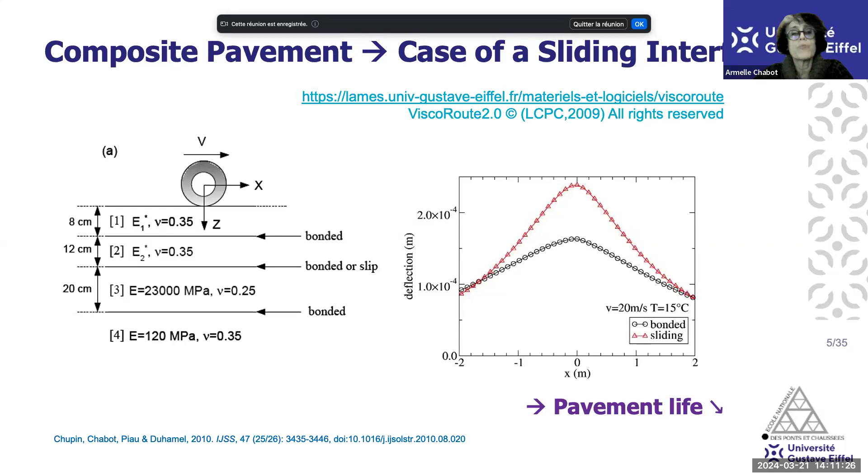If you look on the top of the pavement, sliding interface will make more deflection, and it will play a role on pavement life.

But actually, we need more than modeling and strain gauges or things that are upper the pavement. That's why, with my colleagues from Direction Générale de l'Aviation Civile, Michael Broutin, and my PhD student who did her postdoc there, we use the ovalisation system that was developed by my colleague from LCPC in the past for roads, and we adapt this device for airfield pavement.

And so this device is making, with sensors that are measuring the deformation, the diameter deformation of the hole when you have a load or you use a heavy weight deflectometer.

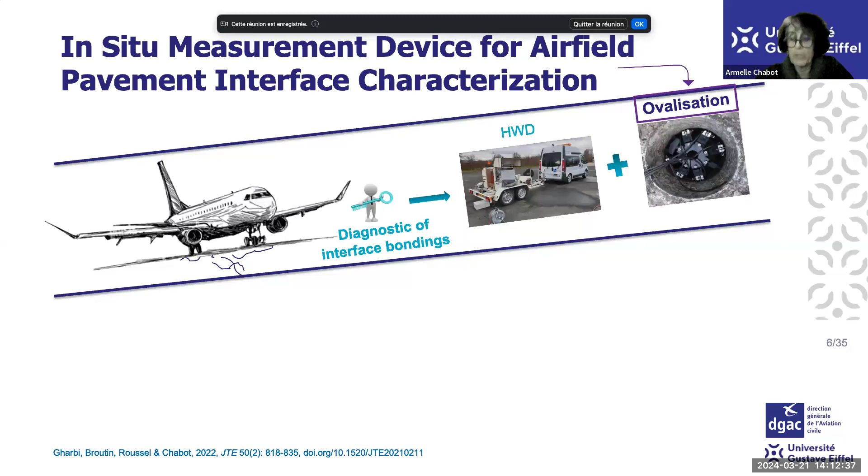So we developed a first specimen, and at DGAC they have now improved this system a lot, and I hope they will present this to you later.

We couldn't use ViscoRoute because there is a hole, and in the software ViscoRoute, we are assuming that the behavior of each layer is the same. It's the same kind of modeling as the Burmister elastic model that is used in our French design method, and I think in America you are using this for KENLAYER software.

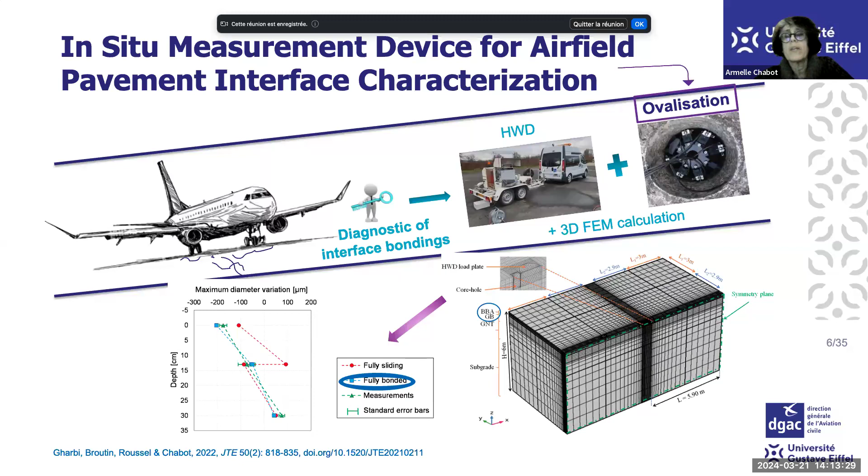And we showed, for one experiment, measuring and getting access to what we had from 3D FEM modeling, that the interface at this location was fully bonded. The main problem for pavement is it's not only full bond or full debonding, it's more complex.

Here on the upper part of the slide, my colleagues from the past took extracted bi-layers from airfield pavement at that time when we developed the Airbus A380. At the time it was named A3XX.

And you can see, it's well known, that if there is a good bond, due to the bending effect of loads, you have tension stress at the bottom, and the crack comes from the bottom up to the pavement. But when I'm saying up to the pavement, it reaches the interface.

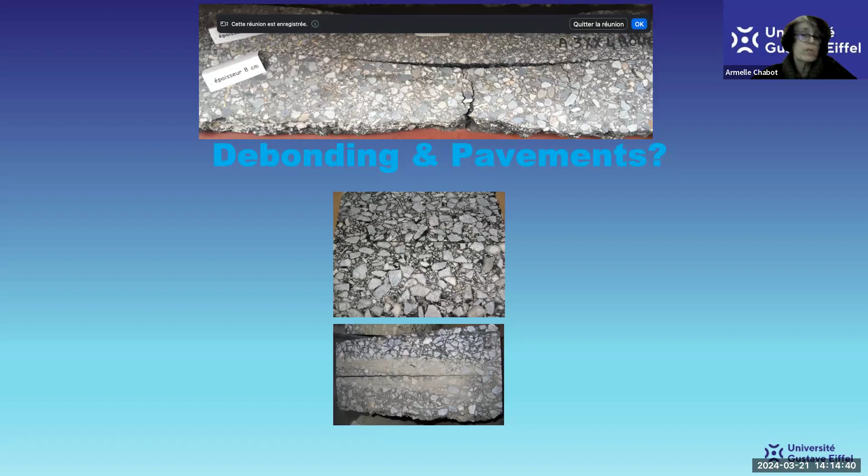And here, we need to have the behavior of the interface and the criteria in the material and in the interface, in order to see if the crack will propagate along the interface or up through the layer.

So my knowledge is more on that, saying that when you have free edges in the multi-layer, you cannot deal with only 2D structural modeling. You need to have 3D.

For this example, if you take 2 layers and do a tension test, you will see that there is sliding at the interface, but at the edge, you also have sliding in this out-of-plane direction.

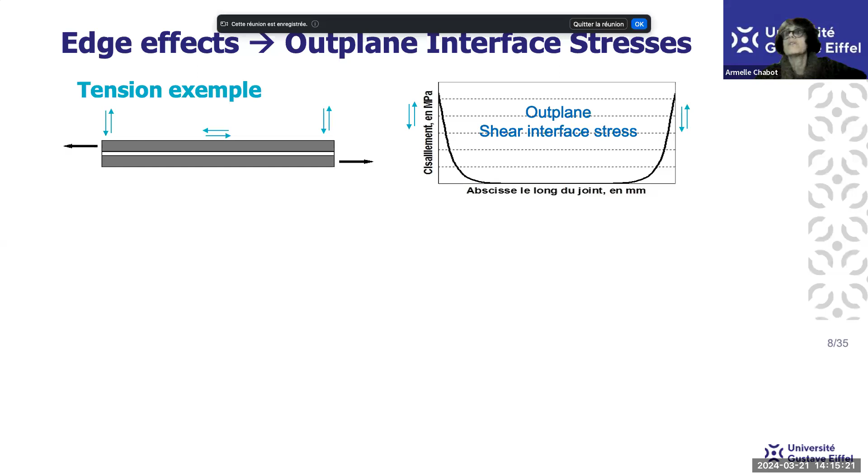It is also well known from the composite field that when you have a bending test, you may assume to have a crack, and normal interface traction and out-of-plane shear interface stress that are quite zero far from the edge, but at the edge there are critical stresses.

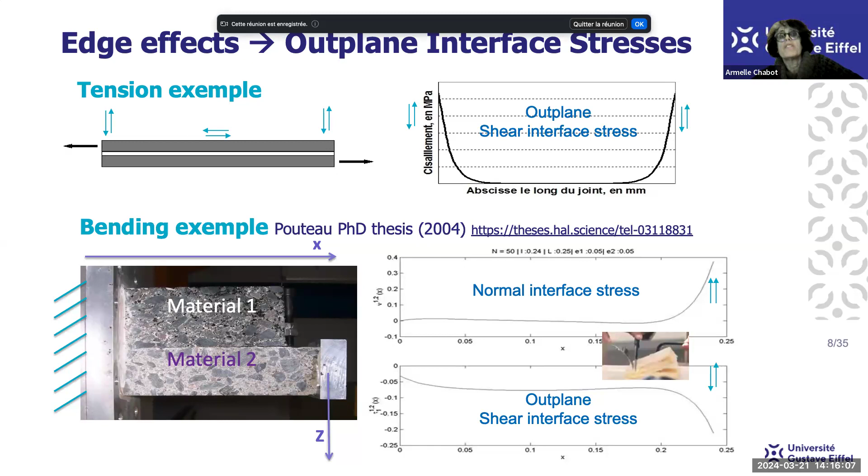And dealing with failure, we need to have tools that are able to model and test, that are able to give this information. That is why in my PhD thesis a long time ago, I studied that, dealing with failure.

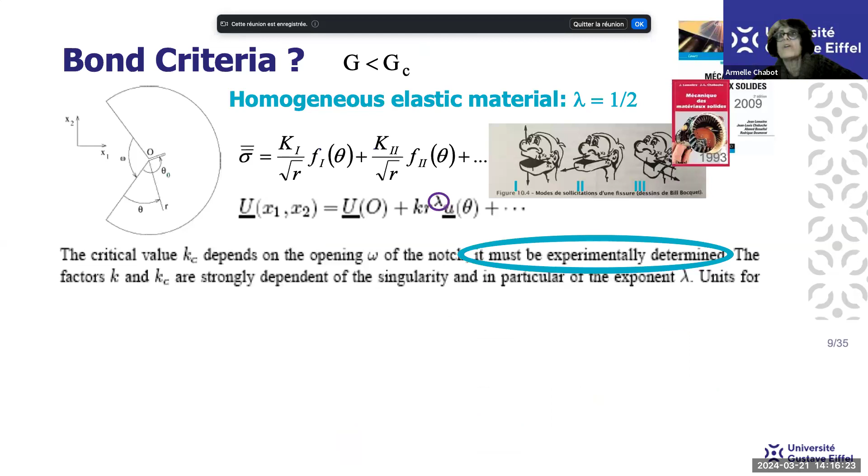Everybody knows that if you deal with a homogeneous material, you will have a singularity at a crack. But for bi-material, when you have a crack at the interface, mathematically and mechanically, the lambda coefficient that is normally 1/2, half, becomes a complex number. So there is no physical meaning.

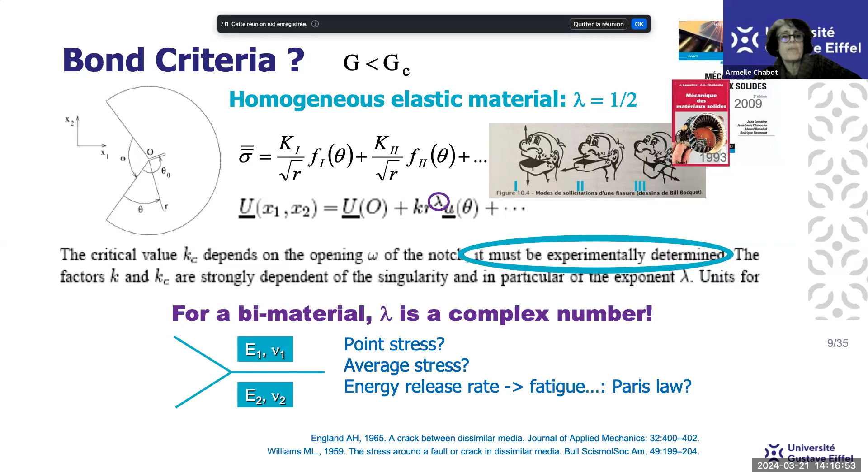And a lot of people have worked on this for the composite field and developed their own models. In my PhD, I developed a family of models that rest on the fact of dealing with multi-layers. It's plates. So I tried to use plate modeling that I have improved.

And saying that, I assume with my advisor, of course, that the 3D stress can be written as a polynomial approximation per layer in Z, where Z is the out-of-plane direction. This is possible in Hellinger-Reissner formulation because it leads to a mixed formulation, making it possible to solve the problem. As we know everything in Z, we only have to deal with solving a problem in X and Y, which are the coordinates of each layer.

To do so, each factor of this polynomial approximation, we choose to have them like a generalized force of plates of Hellinger-Reissner that I'm showing here. So for each layer i, we don't have Z, but we have i, the name of the layer. We have the sigma, 3D sigma, that is developed as a polynomial expression of N, Q, and M.

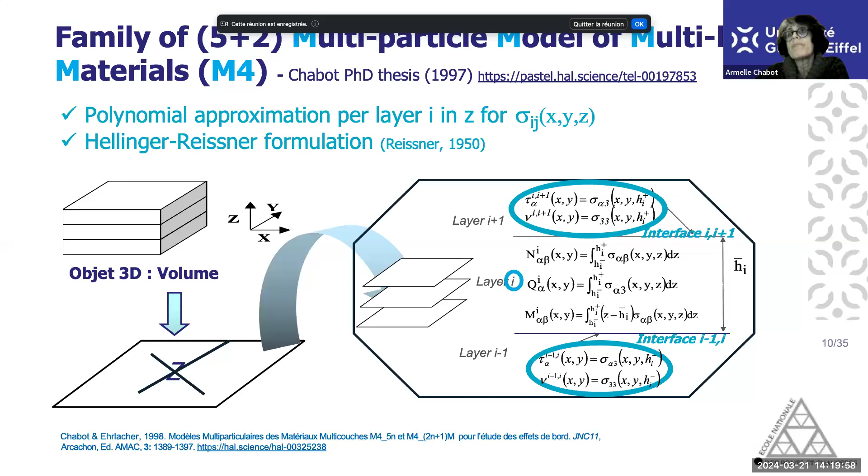So when I came at that time, it was LCPC, not Gustave Eiffel. I tried to develop this model for pavement.

Pavement has a soil, so I chose to use Winkler soil because it's very simple to assume it's a kind of spring. In the composite example I gave with this cohort, dealing with elastic material at that time, but with a vertical crack, you can see in that figure that the interface between layer 2 and layer 3 is opening in this direction. When the loads are close to the crack, the value of this interface becomes bigger and bigger. You can do that with 3D fine modeling, but if you refine the mesh thinner and thinner, you will find you never converge.

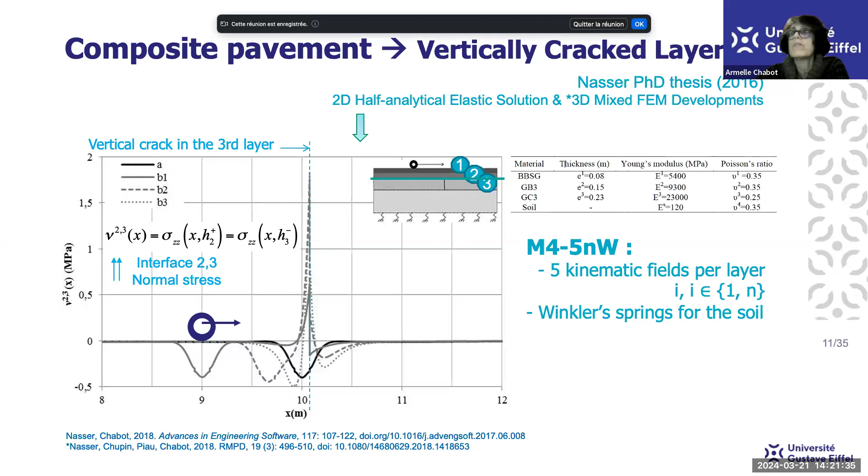With that modeling, it's fixed, so we can compute this and solve it numerically, but at the end it reaches a value. That is very nice if we want to use that modeling in dealing with a criteria.

I just want you to see this illustration. Lately we are also working with electrified roads, and for the induction problem, it's a slab that you put inside the pavement. I was part of a Chen PhD jury and was very surprised there wasn't much information about the bond between the slab and the pavement. That's why I took a student, Pawan Deep, who improved the M4-5N model in order to take into account that other material in one layer.

Of course it's obvious, but if you put a rigid box in an asphalt layer whose modulus is not so strong with temperature and load, I was recommending maybe to deal with that. At that time, the box was made with cement concrete, to have a cement concrete layer on top of asphalt in order to reduce these stresses between the box and the layers.

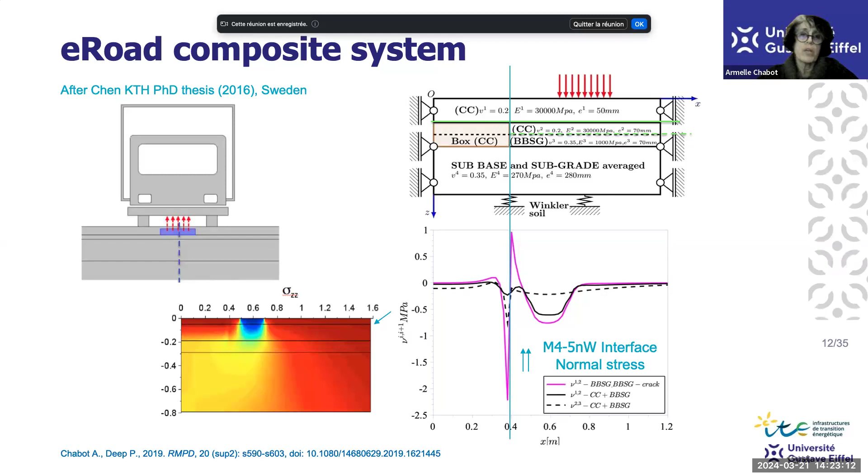That's it for the modeling, but I will come back later. I have mentioned that we need some tests and failure criteria, so that is why I will present lab characterization.

During my stay at Urbana-Champaign in 2010, I had the opportunity with Bill Buttlar to start a new technical committee of RILEM. I pushed a lot to have a technical committee dealing not only with cracking in pavement, but also debonding, and not only in asphalt pavement, but also composite pavements. In that TC, we had three task groups, and in TG2 with Christophe Petit, Alexandra Destrée from BRRC in Brussels, and Christiane Raab from EMPA.

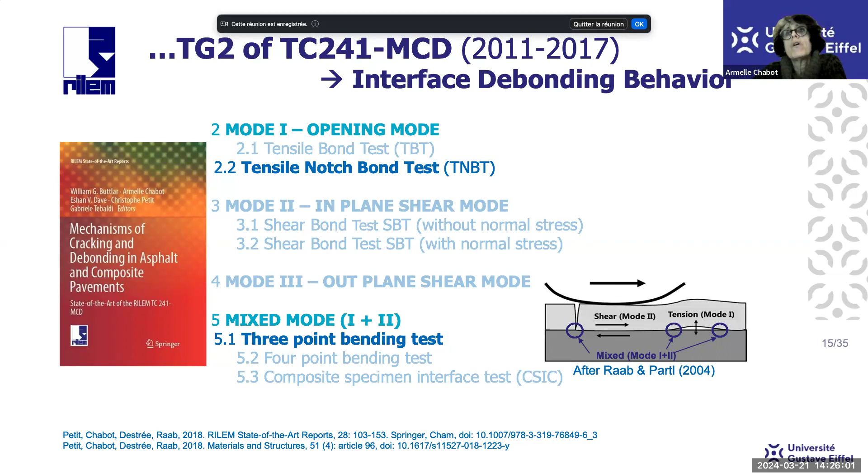So here I will show you what I have done in my lab. First of all, I worked on the bond for ultra-thin white topping. At that time when I came, it was not a question to deal with the bond between asphalt layers - it was something we didn't have to deal with. So I worked on that.

And we developed a test, a four-point bending test, where I used my modeling in order to design the test. First of all, we chose at the end to have a non-symmetrical test in order to localize the debonding at one edge and not at either of the two edges. We follow the debonding with DIC.

In this figure, you can see, between the elastic equivalent modeling of the two layers - asphalt, the black layer 1, and cement concrete, layer 2 - there is a competition between the tension stresses at the bottom of layer 2, supposed to be cement concrete, at points A, B, C, D, and the interface shear and normal stresses.

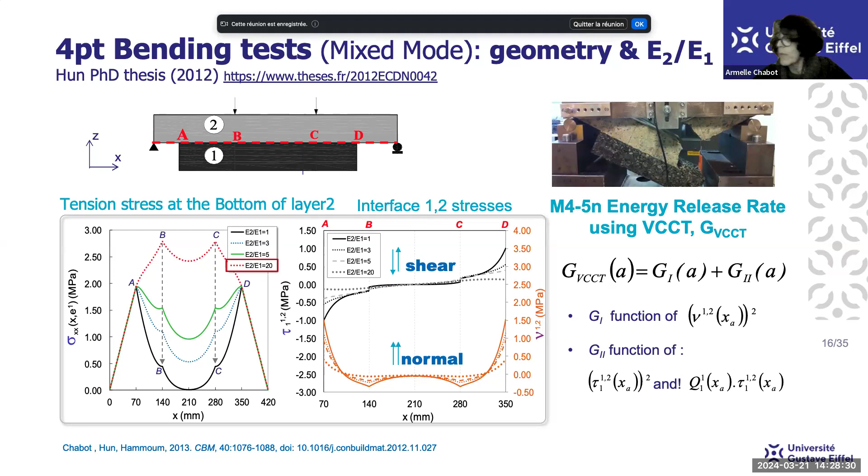And to be sure that it was okay, I needed to have another test in pure mode in order to try to see if I can confirm the question I had. So that's why I chose to develop and adapt the wedge splitting test.

Lately with the ANR project we have and Maïssa Gharbi's PhD thesis, I wanted not to test debonding and the interface with material that have been constructed in the lab. I wanted to get them from a real world test track. So we did that, and to respect the recommendation Professor Tschegg gave, in that project we were also testing interfaces with grid.

It was a need to have a big specimen, with 10 centimeters thickness. To do so, it was not possible to build this 10 centimeter layer in only one layer, so we built this with 2 sub-layers. I will show you only some results dealing with reference material, only with asphalt, but built with 4 layers.

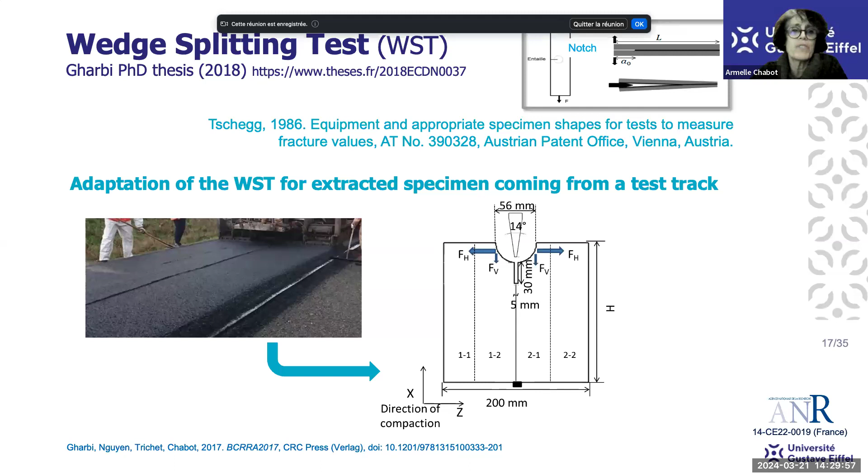And here we used digital image correlation for specimens who were working very well. It was cool to see the location of the crack. I chose the wedge splitting test because it's a test that is quite stable with the propagation of crack in comparison to the 4-point bending test I used before in Manitou Hun's PhD thesis.

I pushed my colleagues to not have only 2 or 3 tests, but more than 9 or 10 tests, as we recommend in RILEM. And here you can see that dealing with only 9 to 10 tests, you have a lot of differences.

So I try to explore, and I started that when Eshan Dave, who is in our room, came and visited us in Nantes. Also I couldn't use my modeling because of the crack that is not brittle, and you have to deal with ductile material.

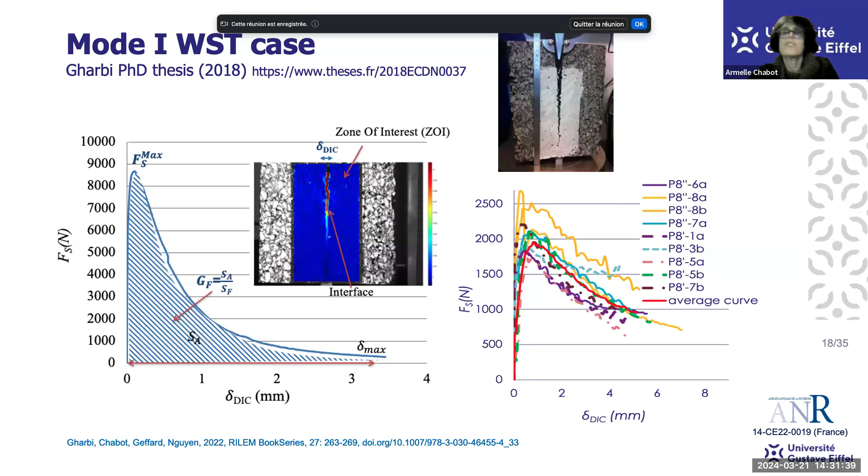So that is why I wanted to compare what you have with the cohesive model in Abaqus with Ishan, who has knowledge, and what my colleague from the past did when I did my PhD in composites.

And I have the chance to have Laurent Gornet in Nantes also, and he put that modeling in a Cast3M free FEM code. In this modeling that is called Viscohinte, it's possible to take into account a delay of the material, that for us is a viscoelasticity, and to take into account several modes like mode 1 and mixed mode.

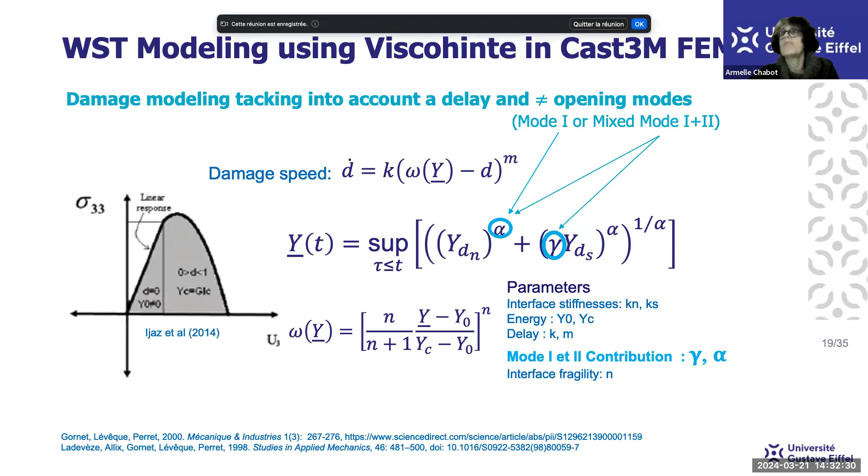We did that for 2 tests with a student from École Centrale Nantes. And for the test in green that didn't work, actually we have some problem with intermediate interface during the test, and we saw debondings. I repeat that these 4 layers are supposed to be the same, but due to the construction and the air void content, we tested this specimen in order to see what was the air void content of each sub-layer.

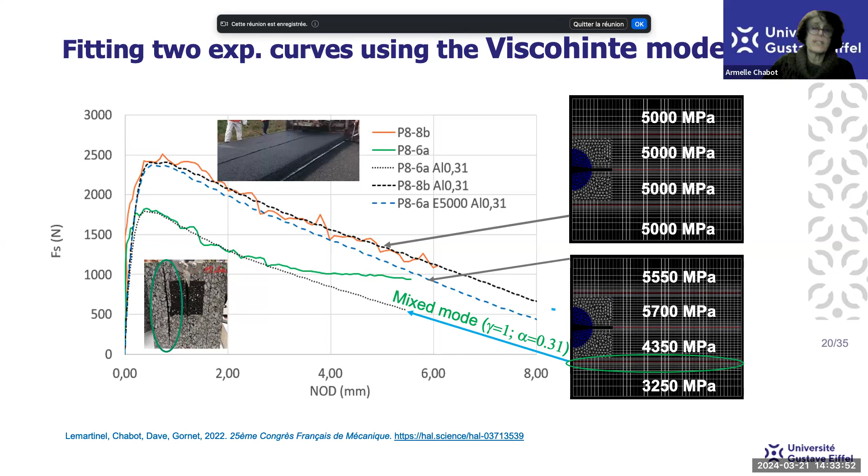And supposing, in the French design method, we are assuming that the modulus is reduced due to air void content. We take this into account in this FEM Viscohinte model, and we explain, activate the mixed mode at this sublayer interface. We explain the result we get. So the work is not finished.

But in the meantime, we are now Gustave Eiffel. We are dealing with cities, and cities is actually a big topic for France. Climate evolution is also a big topic. So in my third part, I will quickly present what we are doing.

You can see last year, the climate and the temperature during August was incredible. And if you look at the predictions, everybody is telling that all the predictions are confirmed. We are all expecting that it's not the case, but for now it is.

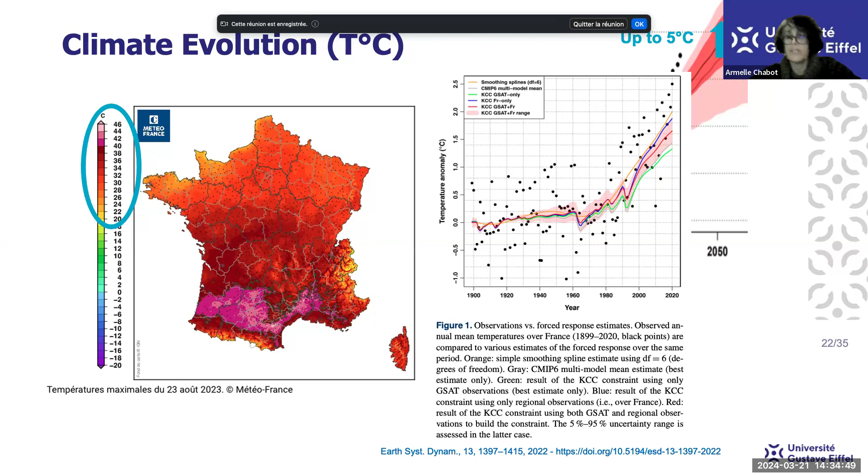And in cities, in 2020, there was 80% of French people living in cities. Nowadays, in the world, there is more than half of the population living in cities. And it's well known that construction, when you are covering the soil with material, increases the heat.

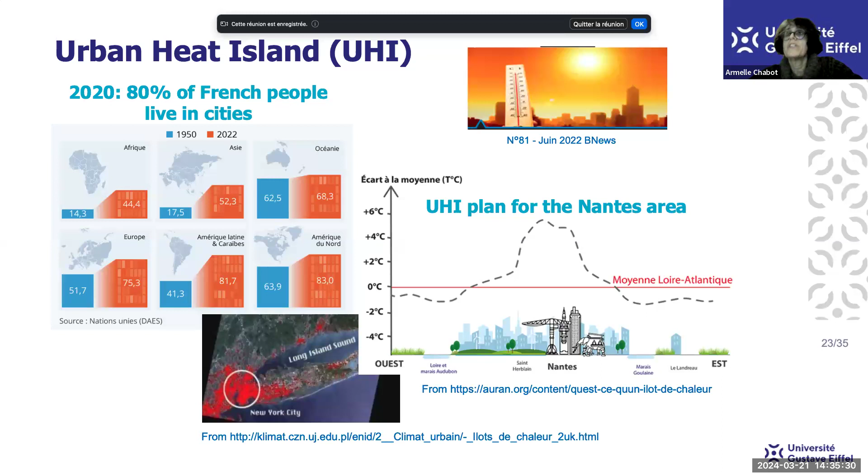Here you've got in the curve the differences of temperature between outside the city of Nantes and inside the city. So that is why there are several solutions.

Of course, a lot of people are dealing with this, like University of Davis since the beginning of 2000, saying that if you are using asphalt, it's a black color, and that is not a good option dealing with temperature.

So some people are trying to put different colors in the pavement. Alexandra Destrée from BRRC, who worked a lot with us at RILEM, has great knowledge on that, and it's not so simple to deal with the color of the pavement, because people have to accept the color. If you use a white color, it reflects the light to the building and to the eyes. It has to be acceptable, and you can have dust on top.

So that's why there are a lot of people working on that, trying to find solutions. In Paris, a lot of people are trying to develop the idea that we don't have to cover the road with asphalt, and instead come back to granular material and cover it with water during the evening. But you need to have water in the city to do that.

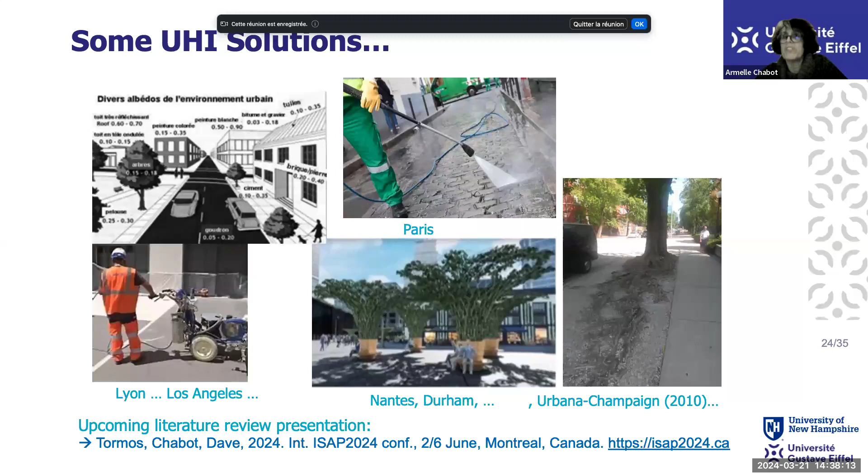So with Eshan Dave, we hired a PhD student, Tormos, who started his PhD in co-tutelle with our two labs in 2022. He will present at ISAP what he has done for the literature review, so I will not go further. For those who will attend the conference, if you are interested, don't hesitate to listen to what he will present.

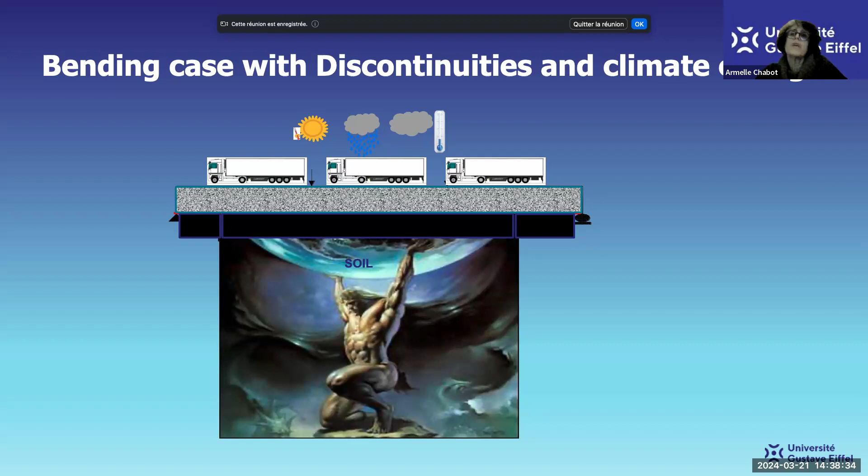Come back to bending case and discontinuity for pavements. Of course, if you have a stiff soil, you have less problem, and the problem you have is only on top of the pavement. If you don't have that, you can have some troubles.

Anyway, I will show you, in the past, before the M4-5N modeling with Winkler spring, I first developed modeling with Boussinesq. At that time, we modeled the effect of the coefficient of thermal expansion in a cement concrete layer, or a material treated with hydraulic material, and we showed the effect, of course, between the soil and this layer at that time.

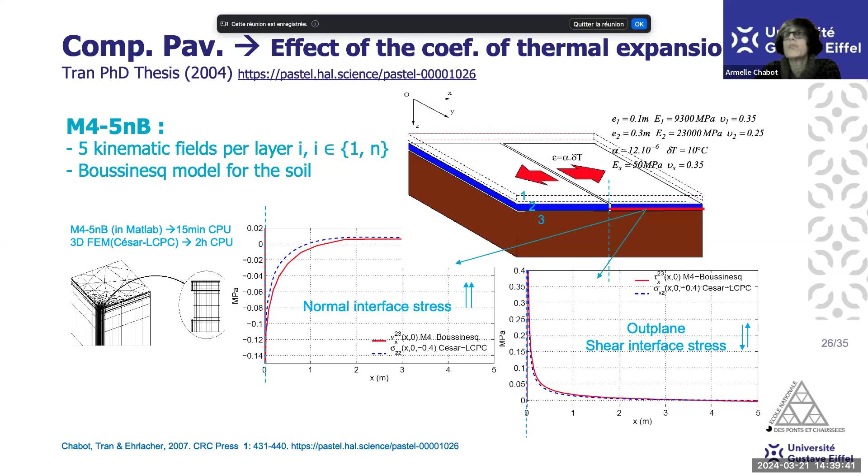We also compared with 3D modeling. We showed that you may have debonding, of course. So in that topic, we will improve that for the upper layer. Doing that, we need to have access to the coefficient of thermal expansion of each material, but it's not obvious.

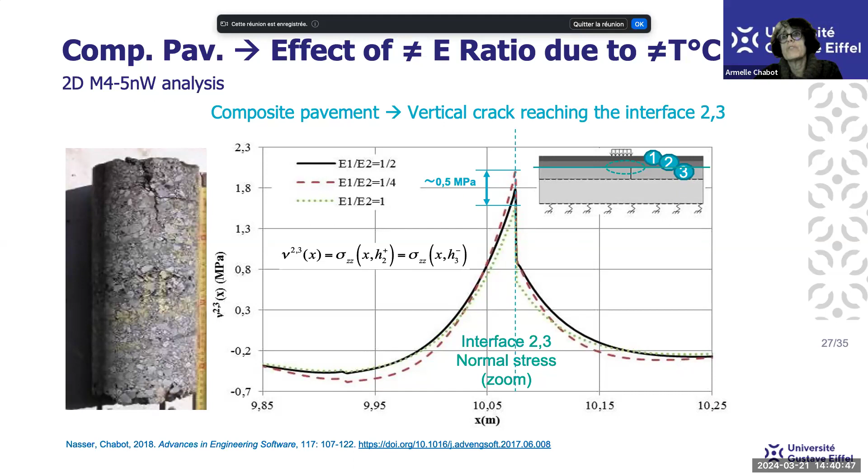And again, with my modeling, the stresses are finite. There is no stress going up to infinity. It means for lab tests, we have to deal with that—we have to see which type of forces we apply on our specimen.

Here I can show you also what we have done in the past, dealing with ultra-thin whitetopping. I guess you had a nice presentation from our colleague Julie Vandenbossche from University of Pittsburgh, who has huge knowledge on that. But in 2004, we tested the joint of ultra-thin whitetopping.

Here you can see the differences in debonding we get from material that was tested during winter season and summer season. Ultra-thin whitetopping is a cement concrete that is cast on top of asphalt material. We can also deal with the interface, not only the interface—you can assume a free material, and the third option is an intermediate material between the cement concrete and the asphalt material.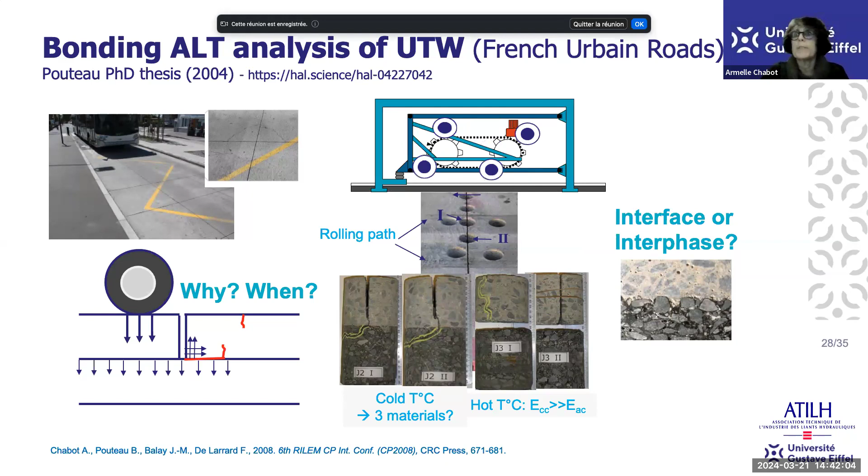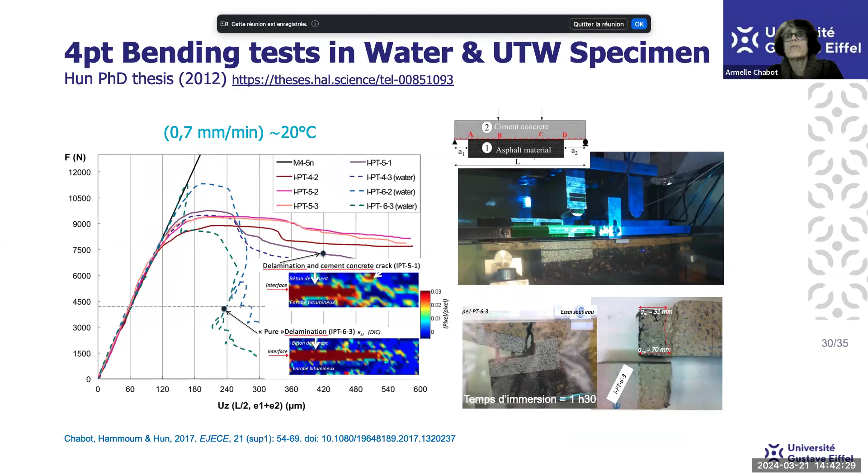My question is also about a national project we've accepted in France on urban heat islands. It's quite new, and we have to work more with people dealing with cities, because they are improving the cities. They have a lot of ideas, and with their ideas, they are putting things inside the roads, so we cannot ignore that. We need good modeling, not only pure multi-layer modeling, in order to have a response on the durability of such systems.

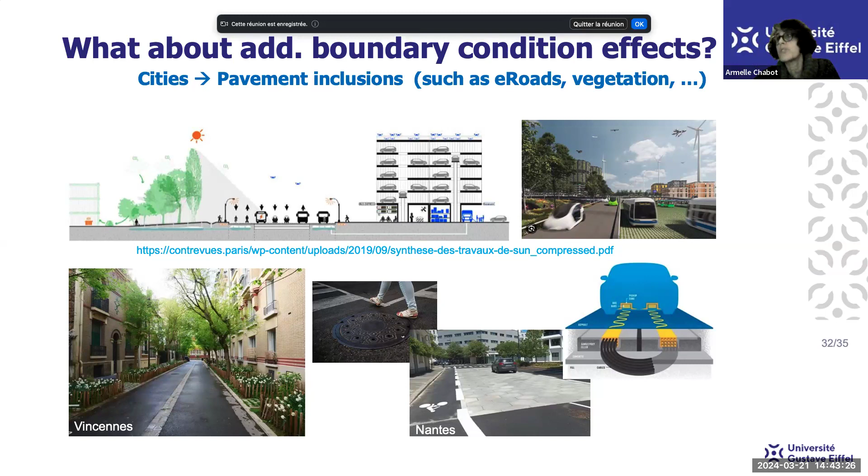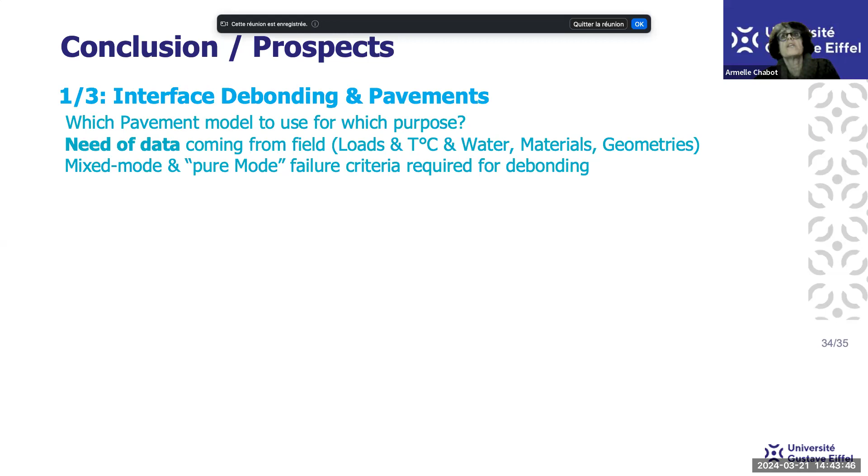So for my conclusion, for the first part, there's a need to get data coming from the field for the different loads, different temperatures and water, and the geometries, like I said. There's a need to have repeated testing results. I didn't talk about the size of the specimen, but of course if you're dealing with cracking, it's a question. The cement concrete field has a lot of knowledge on that, and in my sense we ignore it a little bit for asphalt.

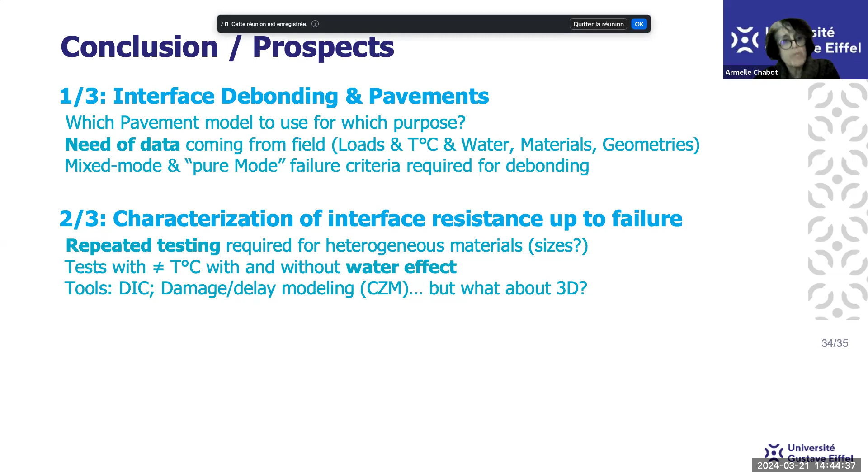It's a pity, we cannot ignore the water effect. If we test and use tools that give us results in 2D, but these results are made from specimens that are 3D, we have to be very careful about the results we are having.

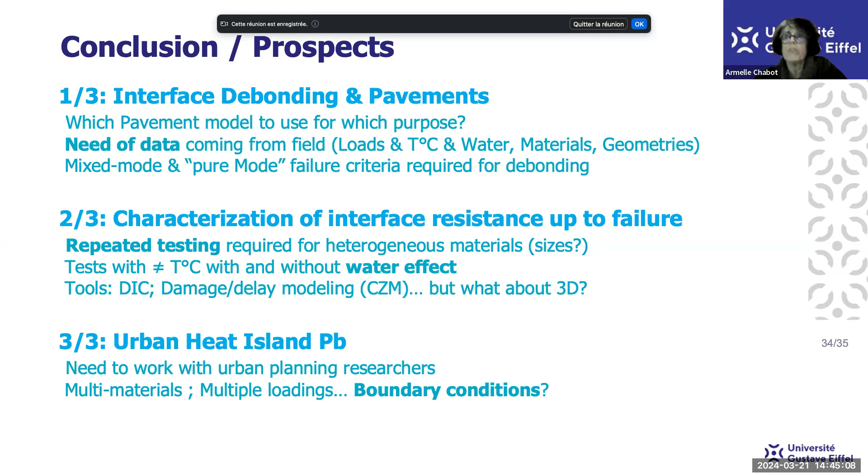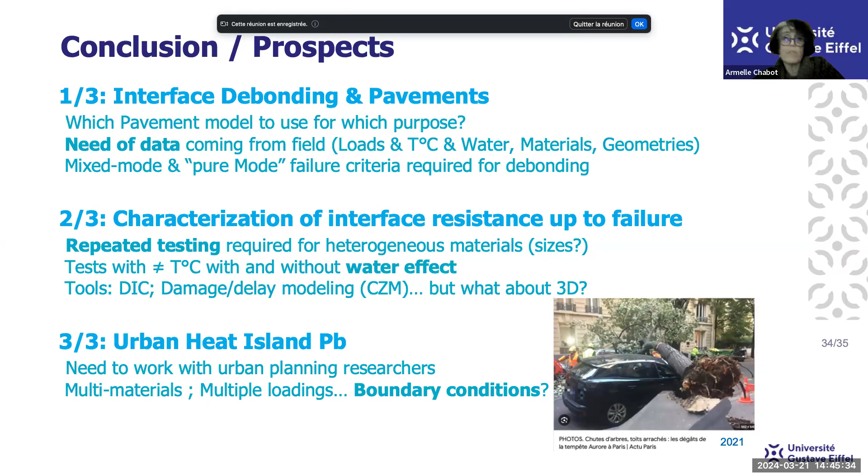So thank you for your attention, and I will be pleased to answer your questions.